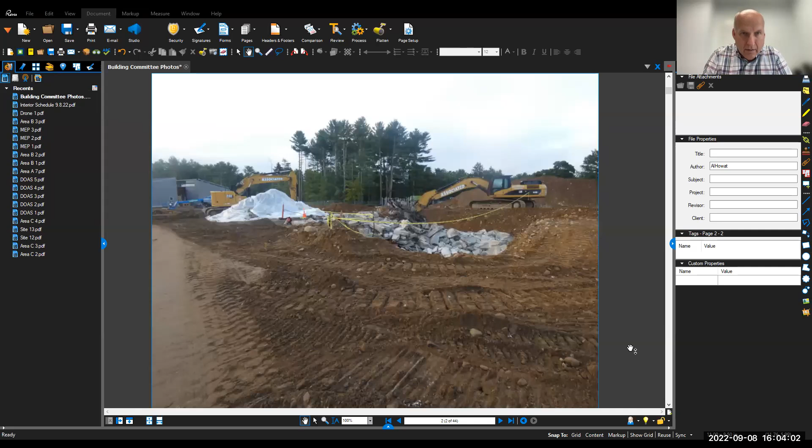Al, can you give us your update? All right, I'll share the screen. All right, can everyone see the photos? Yes, we can, thanks. Okay, so this is what's left of the old school.

This pile is asbestos containing concrete. This pile here is non-asbestos containing concrete, but most of this was removed today, so they'll be completely done tomorrow. They'll have this graded flat tomorrow, including the asbestos material. There were 2 loads of asbestos that went out today to New York. Yes, that's all done.

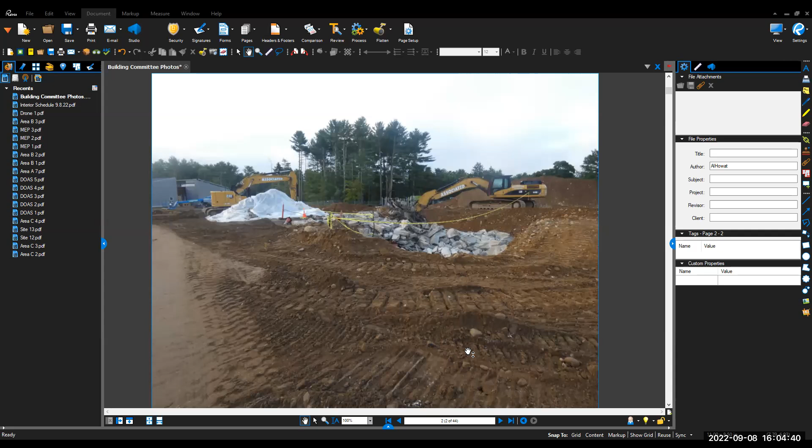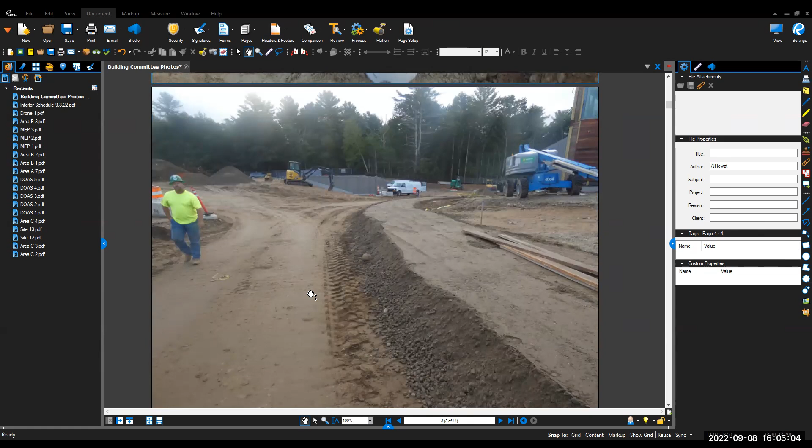They're currently doing site lighting in the parking lot area - parking lot site lights and bollards. We're also boxing out sidewalks around the bus loop, and this is down to the loading dock area.

We're spreading topsoil. This is the rain garden, getting ready to start the work here with the landscaper.

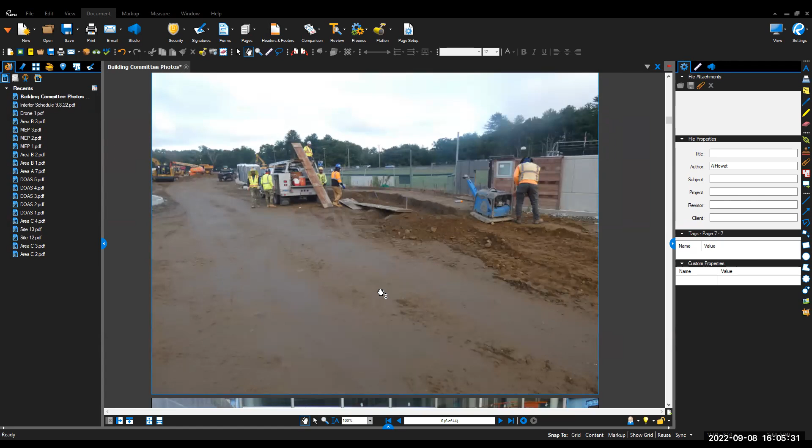They're continuing the sidewalks around the south side of the bus loop, forming those up today. This is the patio off the cafe, a concrete patio, so they started forming this up. They'll pour these in sections - there's probably about 12 sections.

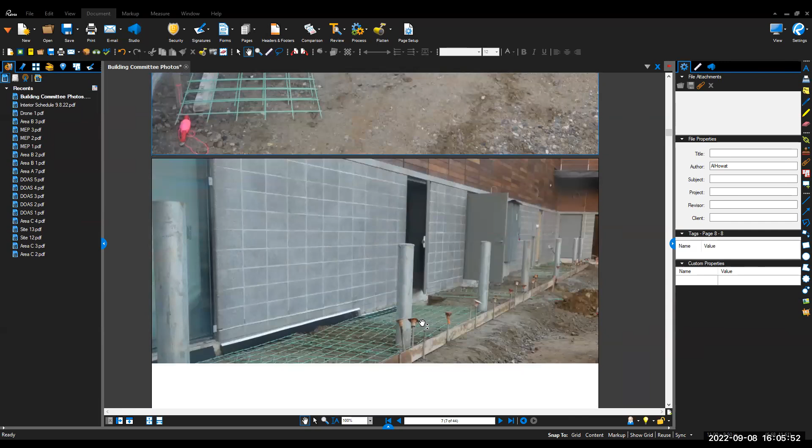This is sidewalk along the north side of B. A lot of maintenance, electrical, mechanical closets along this, right? So it's like a service corridor.

This is the entry canopy, started. Should be a couple of weeks.

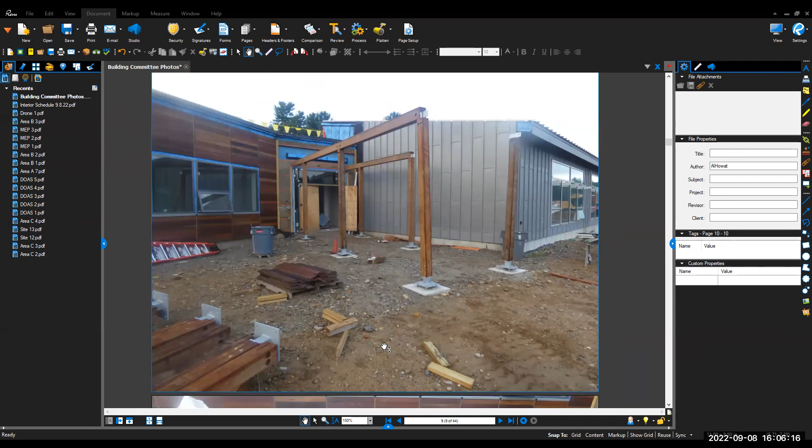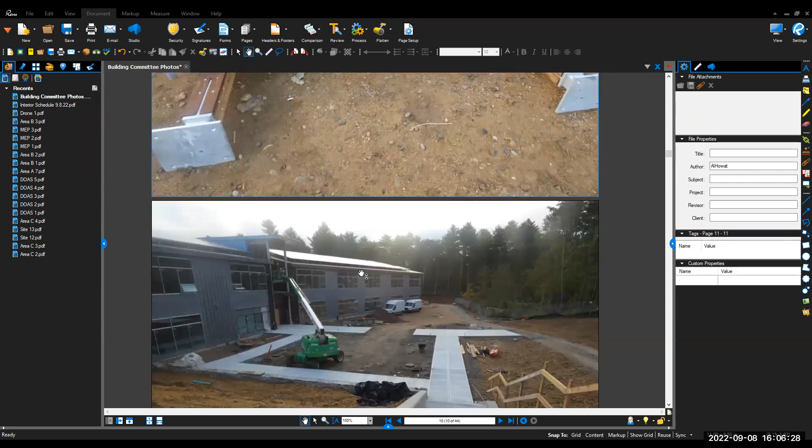This is the south side of building B, or area B. Getting the play areas established.

Is that area about ready for topsoil, Al, or is it not yet? I was thinking that the sloped area in particular. Oh yeah, they're coming through now with gutters. So once, I'd say in another week and a half, they'll be doing topsoil over here. They're going to concentrate on the south side of this ramp, then move to this side of the ramp once that's done. So I'd say a week and a half. At the next building committee meeting, you'll see topsoil here for sure.

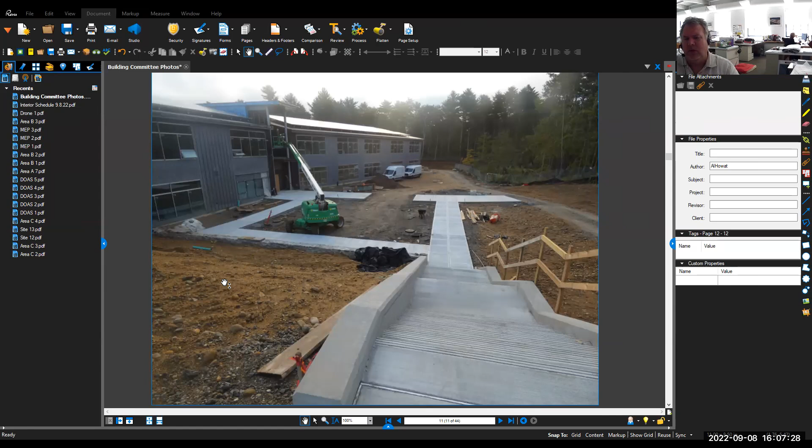Can I just add a comment? Tony had asked last time if there was going to be a guardrail along the top edge of that sloped area, and there is, because there's a sidewalk that's going to connect to the stairway, and there's a guardrail with some benches in front, and that's all for the playground that's behind us in this photo.

I think I have another photo. Oh no, just the playground being installed.

Al, if you could - Scott from Colliers, I would like to add one other comment: please make sure you're coordinating with zoning as far as completion in regards to turf establishment and stormwater management. Will zoning accept the project as complete? Will that permit be able to be issued if we're still waiting for grass to be established and if stormwater management measures are still in place?

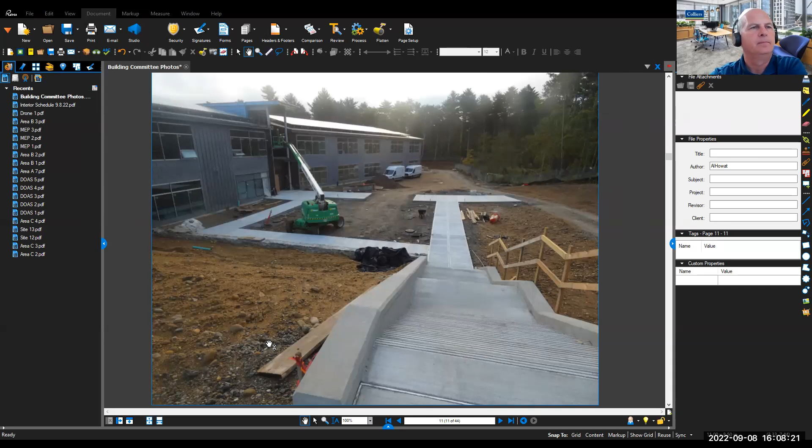Okay. It's the playground area over the detention system.

These are the site light bases along the south side of the bus loop. It's just about done. They should be backfilling and then boxing out this roadway, which will go right down to the loading dock eventually.

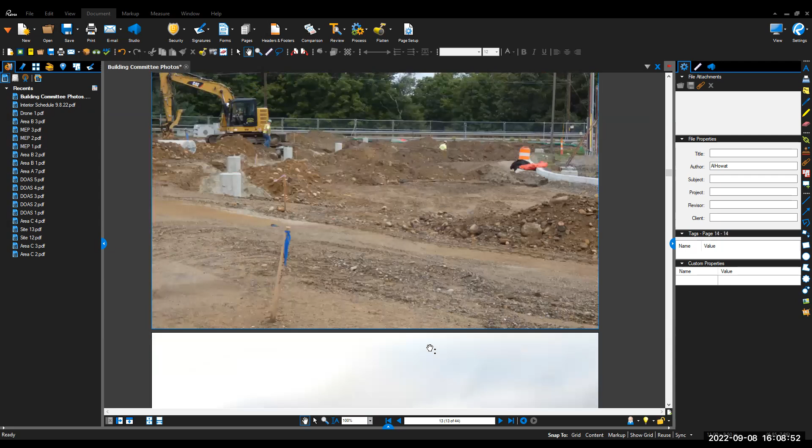Can I help you? Hi, yes, how are you? Good. All right, so this is the west side of the building, building A.

They're currently doing fascias over here, and gutters will follow shortly. They're working the backside with gutters, and then it'll be coming around here.

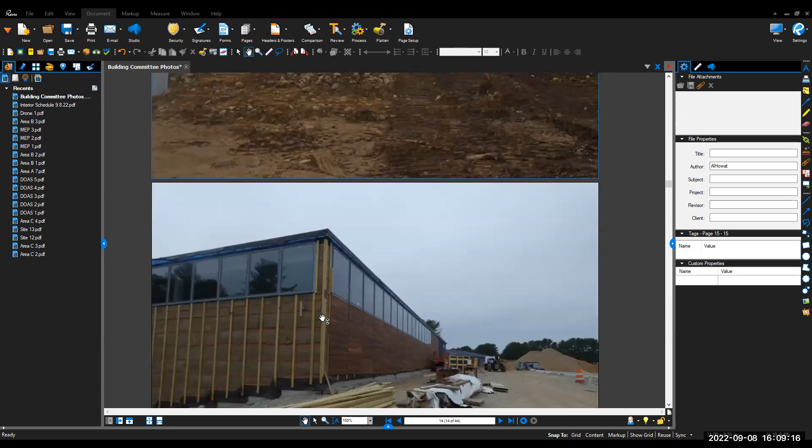This is the north side of the gym. This is the east side of the gym. They'll be here next with the Ipe siding.

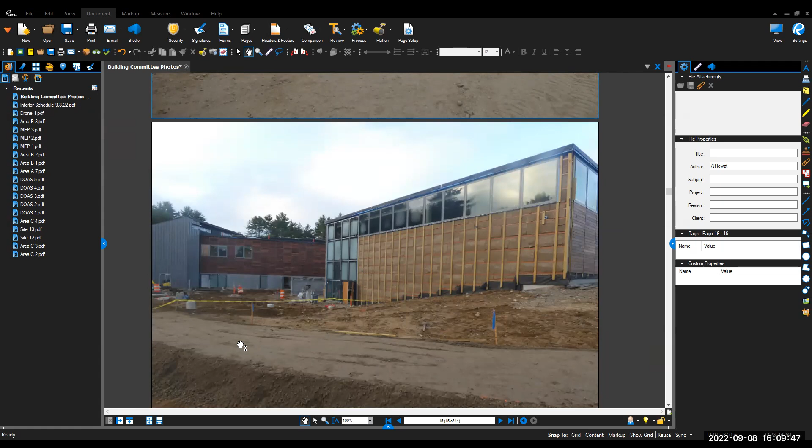They're just about done with the Ipe siding on the B area. They just got to finish up this little bit of soffit over here, then they'll be moving over to this area of the gym. This is the walkways that they're establishing now, concrete walks.

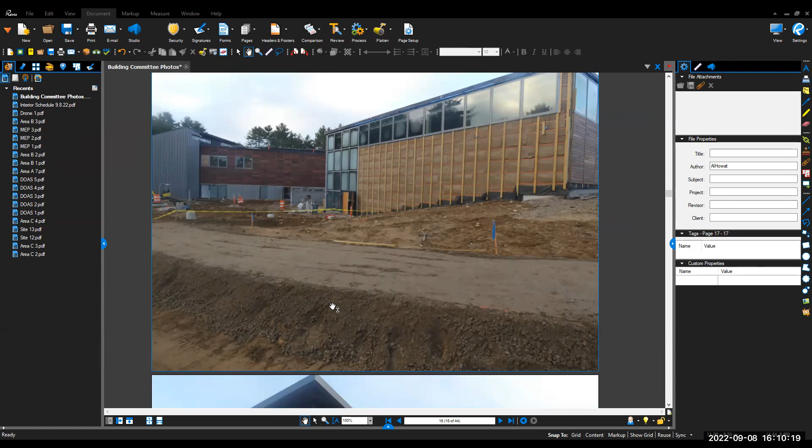There seems to be a drop off on the side of the sidewalk. Oh, this will be road base over here. So it will be level when it's done? No, actually the sidewalk will be higher, about 6 inches higher than the roadway. There'll be a monolithic curb and walk here. Okay, thanks.

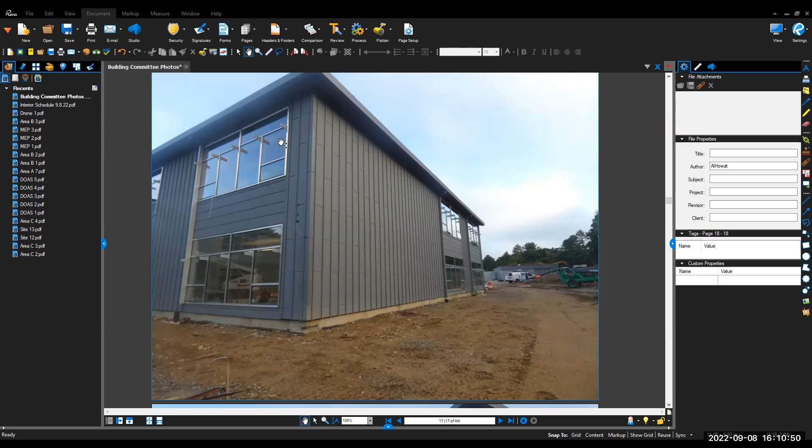So this is the east side of the B North. The fascias and soffits are complete. The gutter is complete in this area. They're doing downspouts now. They got 2 downspouts over here, and more coming along this side. The sunshades for the windows showed up and are starting to be installed. This picture doesn't have it, but they did start installing the sunshades today. Once the sunshades go on, they can finish their caps, and that'll be it for the exterior building.

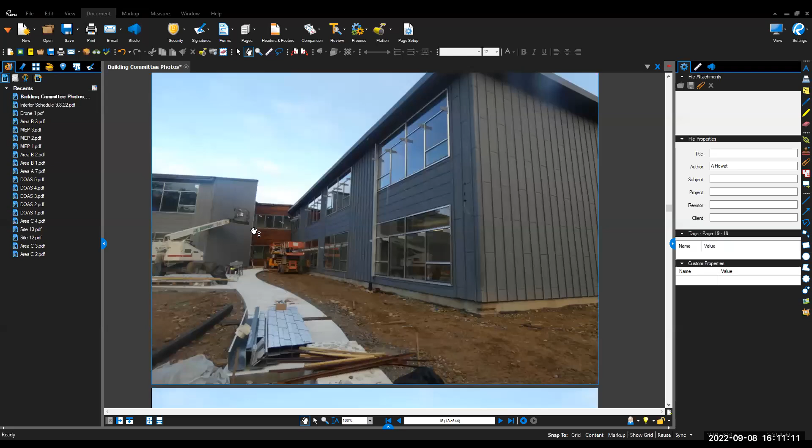Over here, they're working on the sunshades and the gutters and soffits. Just a close up of that. How much of the soffits are done at this point now? I would say about 70%.

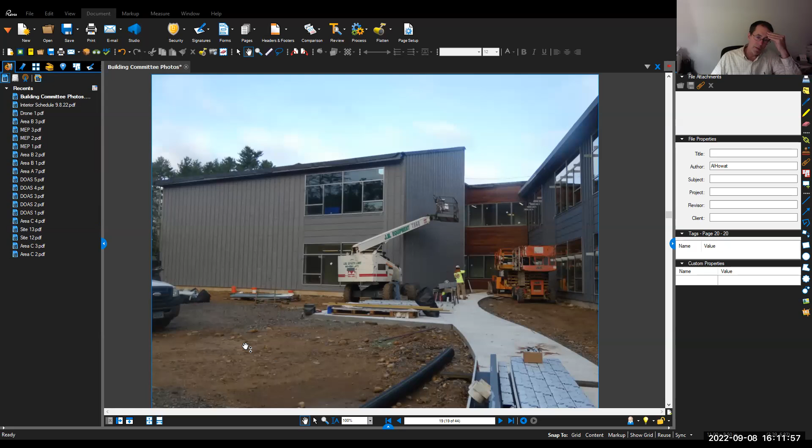Okay, Al, how are we doing on the air leak situation? They're working in area A now, so we should be getting a retest of area A, I would say the week after next. So can we assume these 2 wings are good? Oh, these 2 wings are good, they've already been tested. Yeah, area A had a small leak at that metal roof, and they're over there now buttoning that up. So that should be ready for a retest in the next week or so.

Al, I know we talked a little on the recent walkabout about the relative ease at which the panels can get dented, dinged, or punctured. Are these panels, if one did get damaged - I know color match and patina match, if you replace one down the road it'll probably stand out - but if one was replaced early on, is it just a matter of easily popping out one panel? Or is there a whole cascading thing where you have to pop a whole bunch of panels off to replace one? Yeah, it depends on where it is. I think the vertical panels are easier to replace than these. That's what I was talking about.

As far as scratching of this product, the zinc, it's this interesting material that we've used in the past, and when there are scratches and things that happen on it, it self-heals. It actually oxidizes and heals itself, which is interesting. As far as big dents and stuff, that's another issue, but we do have the standing seams that would prevent anything from hitting the flat part of it. But as with any building or siding, you have to take care somewhat of the school and the siding. So it does self-heal with any scratches, and we'll never have to paint it.

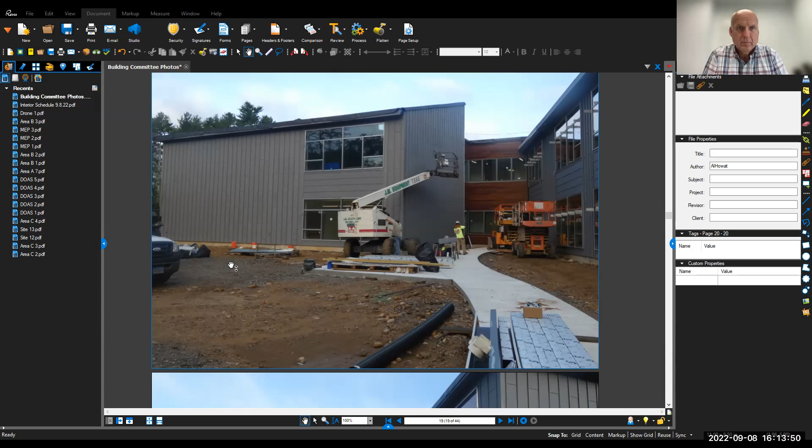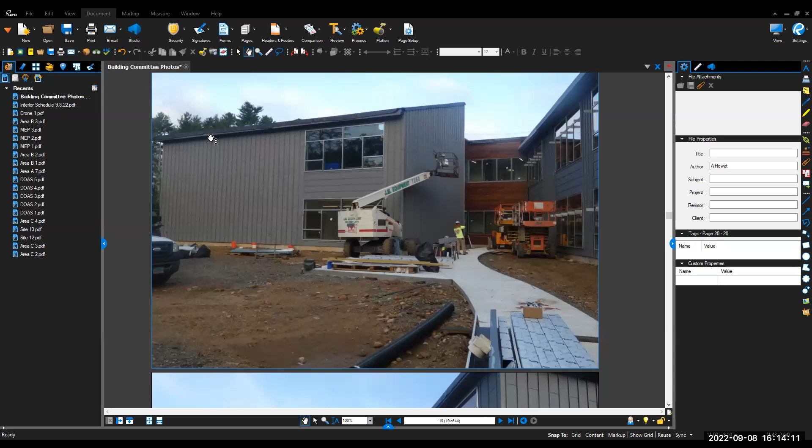So in this photo here, you'll see that the rubber roof is overhanging the edge here. The soffit and fascia is complete. When they come and do the gutter, which will be after this section here, they'll terminate the rubber at this roof before they install the gutter. So that's the next step. These fascias and soffits are done, and they're working on the other side now.

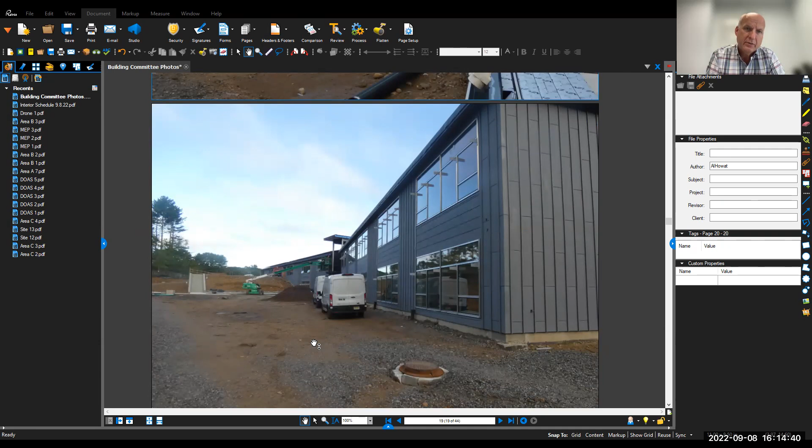This is the south side of A, and fascia and soffits are done on the B section. This is them over there, working the A section now. Then they'll move over to the other side with the metal, which they're doing, and that will complete fascias and soffits. Once the caps and the light shades are on the window, that's when you can do the topsoil in that area. I guess - yes, have to.

We can work off lifts from this gravel area if we had to, but we think we're going to have these done in time. They know that we have the flow of work getting out of this area here first, and then working around the building counterclockwise.

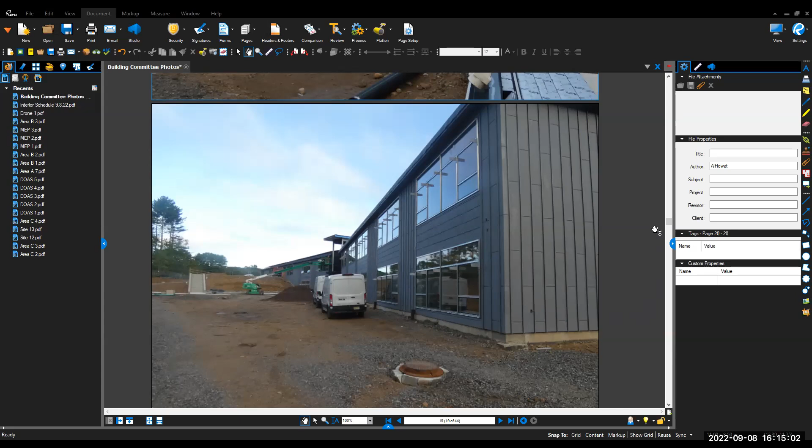Just a quick question for Jeff. What are being called sunshades, is that what they're called? Yeah, those little fins that are sticking out. You see, there's going to be a horizontal sunshade there that will deflect or reflect the light back into the classrooms. That's why I was curious.

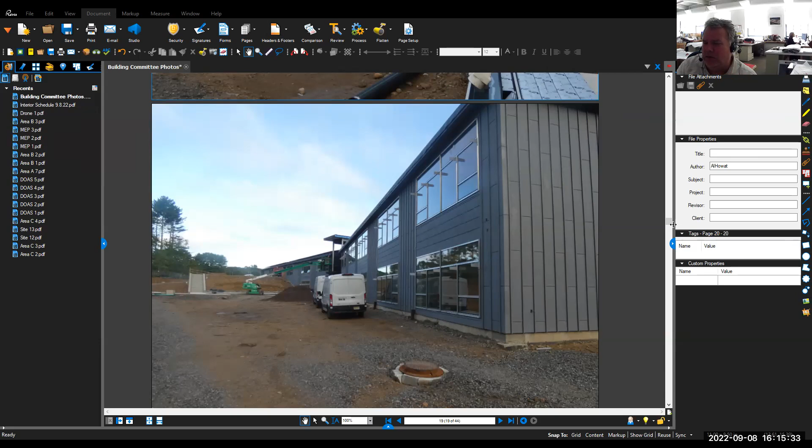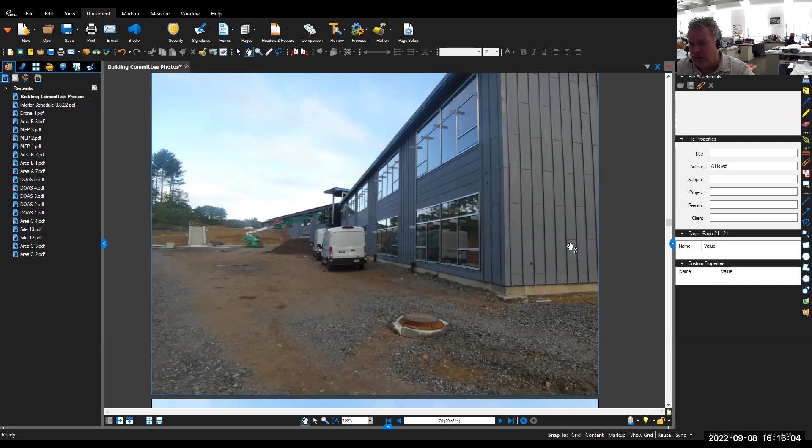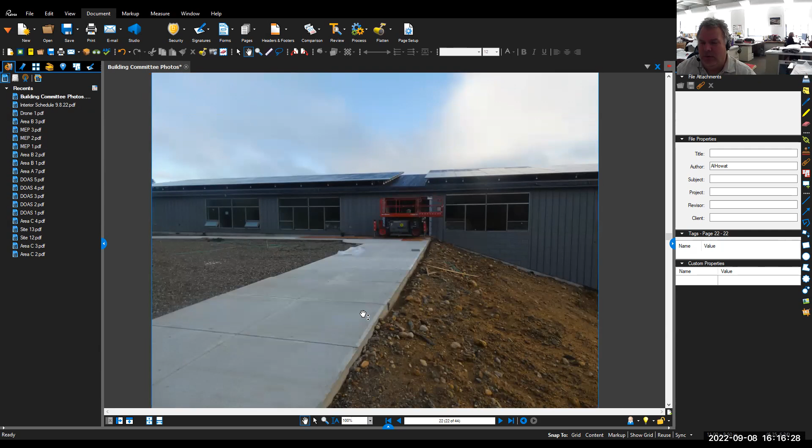This is area A. So that's where the guardrail will go, Tony, on the right side edge of that slab, right here. I believe that's 42 inches tall.

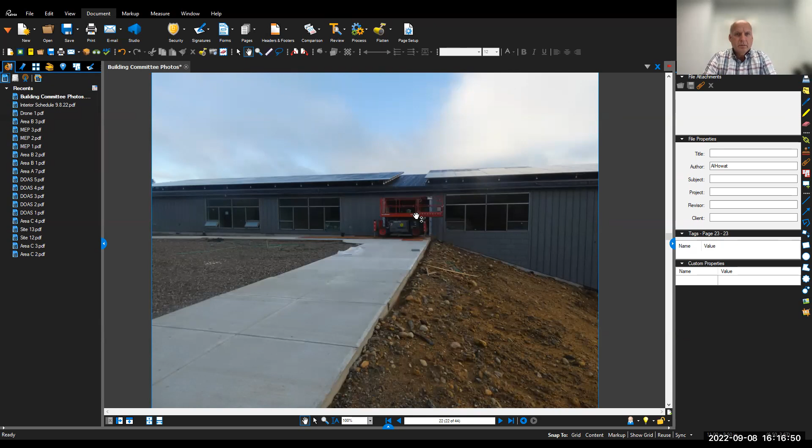And is the door in there yet? Or is that... can't tell. The frame is installed. We haven't installed any doors yet because those are the first things that would get damaged. So the doors go in, not last, but they go in when most of the work is done.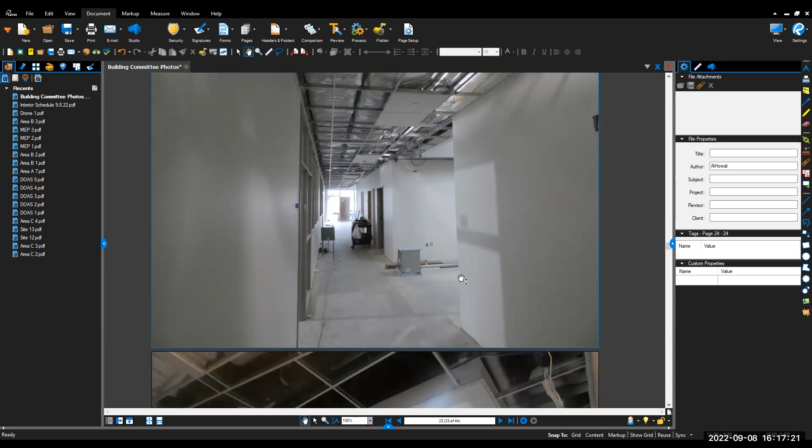This is the skylight area in A, which is completely painted. That's in the breakout space and next to the teacher workroom, so that's going to be a really nice space.

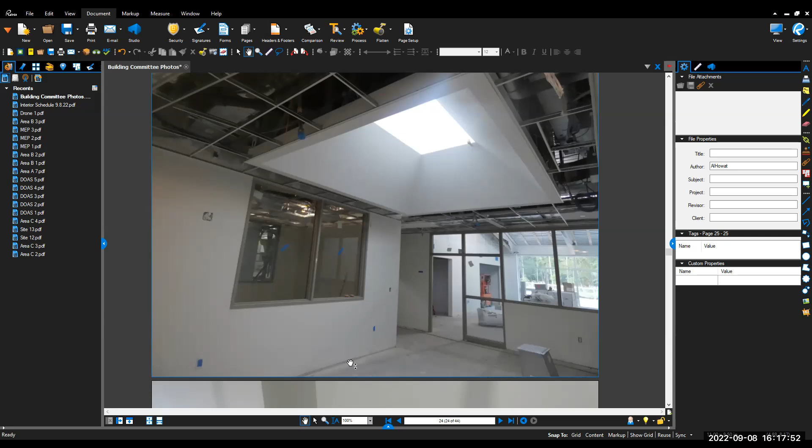Is this skylight installed there, Al, or is it? Yes, it is. We have all the skylights except for the one over the grand stair. That one is still coming in late, but we got the ones in the library, the round ones, and we've got these installed. They came in earlier.

Looks like that's a tremendous amount of light. Most of the interior glass is installed in A as well.

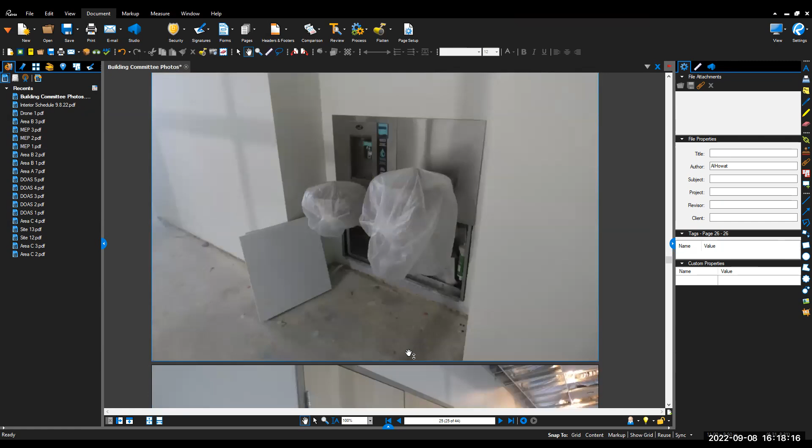Most of the plumbing fixtures have been installed in A. If you notice, there's a water bottle refill as well. Yeah, that's great.

These are what your doors will look like. We installed these doors only because this is a telecommunications closet and we wanted to keep the dust out, but these are what the doors will look like. This is a finished product, except for the hardware.

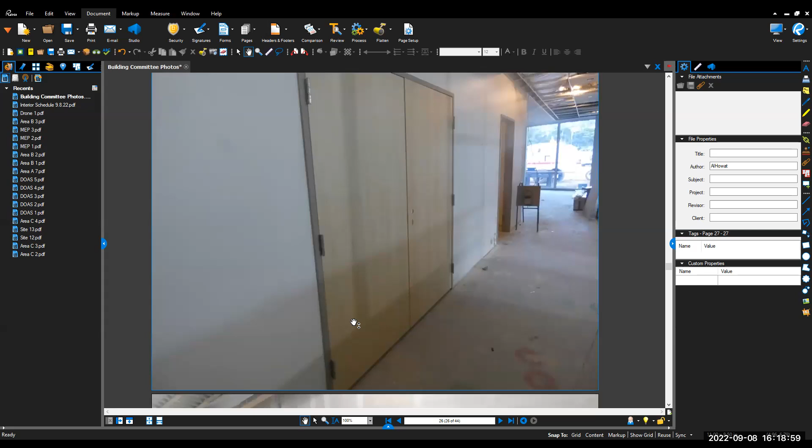That wouldn't include classroom doors, right? I'm not sure if the classroom doors have lights in them or if they're solid. Do you know, Jeff? I believe they're solid because we have the side lights. Okay, so this would be exactly like the classrooms as well.

These are all the marker boards and whiteboards. They all came in, so we've got that on the schedule to start install right after final paint.

Are these whiteboards or smart boards? These are whiteboards, smart boards are a totally different thing. I know, but the classrooms are going to have both? Yes, most of them, yeah. Thank you.

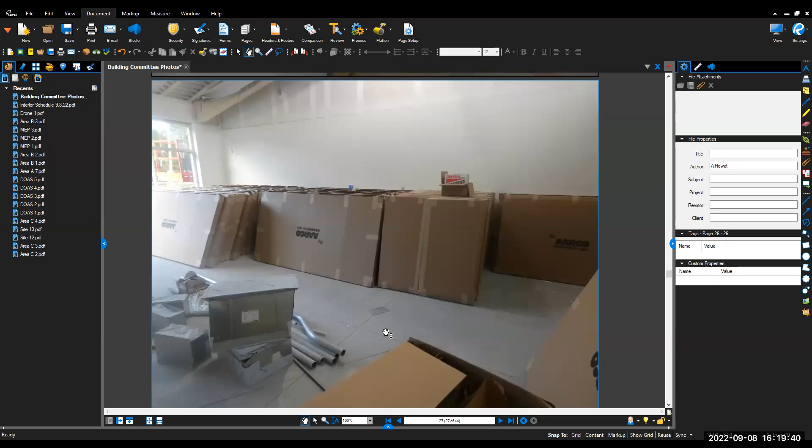So these are the bathrooms in A. They're not 100% done. They're going through now with their specialties, their grab bars and soap dispensers and all that stuff, putting those in. The tiles installed, the fixtures are in place, the walls are painted, mirror, door, and then final paint.

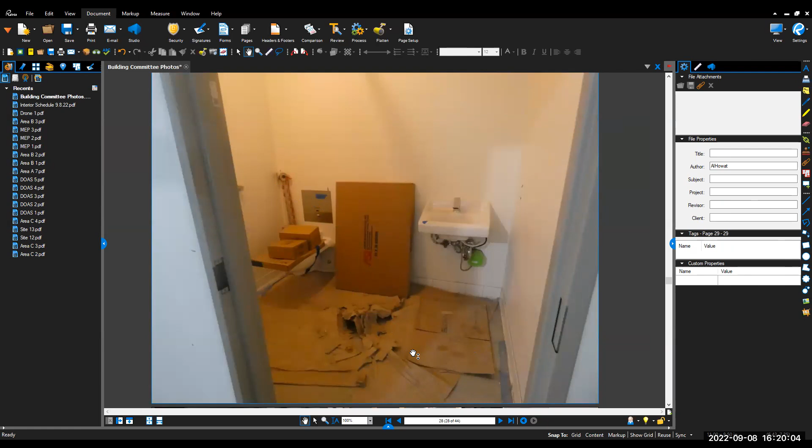This is your typical classroom in A. The walls have been painted, we're ready for wood on the ceiling, ready for millwork, and that's been scheduled. And that shed is gone now, you can see through the window.

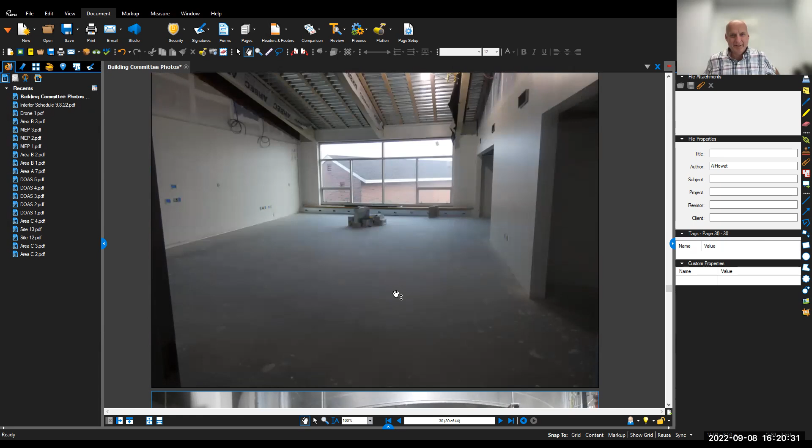Yeah, this is the old pump house. It got demolished, yeah.

All right, so this is what everyone was waiting for. This is the DOAS unit. Came in last week in pieces and they're hooking it up now.

What is that circular thing on the top? This here is ductwork. So this ductwork circles around and comes into the unit over here. And is that bringing in outside air? Yes. Okay.

So they just finished the connecting of the duct today on this side, and they're getting ready now to do the piping. You see the piping over here is capped off, but they're getting ready to do that now that the ductwork's done. Sorry, I want to go back to Tony's question.

It looks like in some areas we do have glass in the doors and other areas we have solid doors.

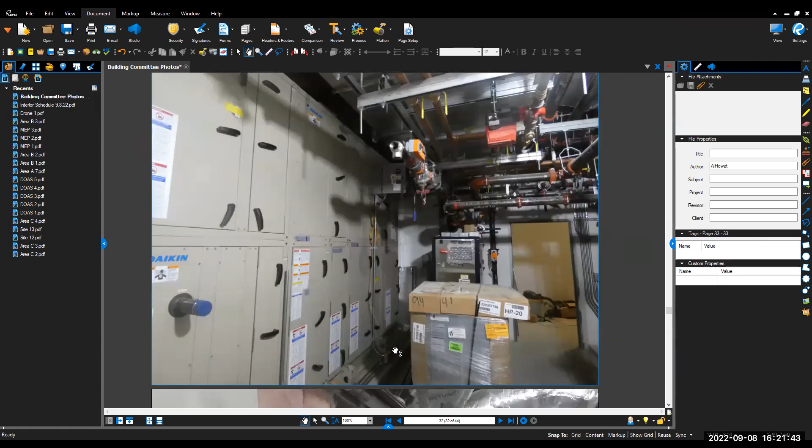So this is the interior of B wing. This is where we had to leave this out to get the DOAS unit in, so we've started framing these walls up now, getting that corridor complete. These are the interior walls in the mechanical room, framing those up now.

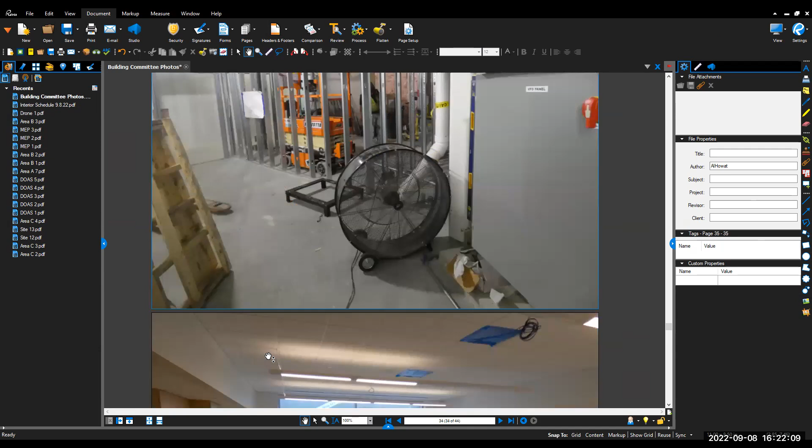And I didn't notice, Al, is the opening that you had in the side of the library been closed off? No, we have started closing off the interior at the corridor to get those walls in, but we left 2 doors out just for remaining items we need to get in.

Okay, 2 windows are left out. Those will be going in next week.

So this is your typical classroom in the B wing. The millwork is complete. Lights are in, ceiling is complete. Walls are painted.

We're actually going to be starting here. I have a finished schedule that I just completed. We're going to be starting here with final paint. That'll be a week from Monday.

Then where was the dusting problem, and when do we get to final floor? This area here is one of the areas that is dusting. We still have work to do on how we're going to remediate the floor for the tile. So that's yet to be determined. I have it on my schedule.

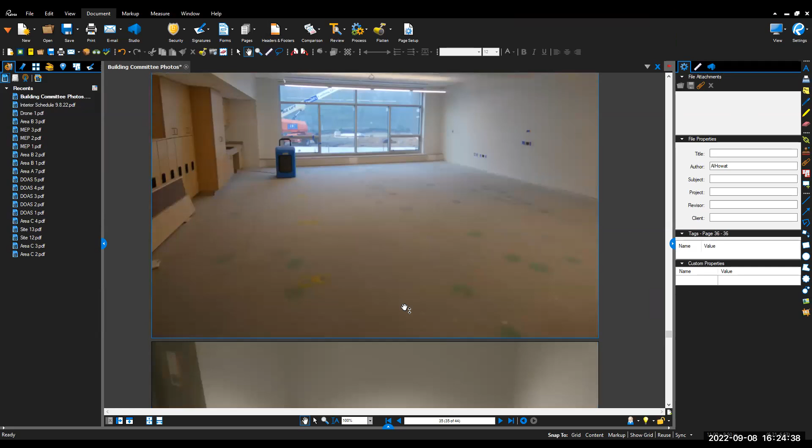The bathrooms now, they're putting in the baby changing stations, the grab bars, the toilet paper and all that. These are the unisex bathrooms. The partitions are in. They're installing all the grab bars and specialties in there now.

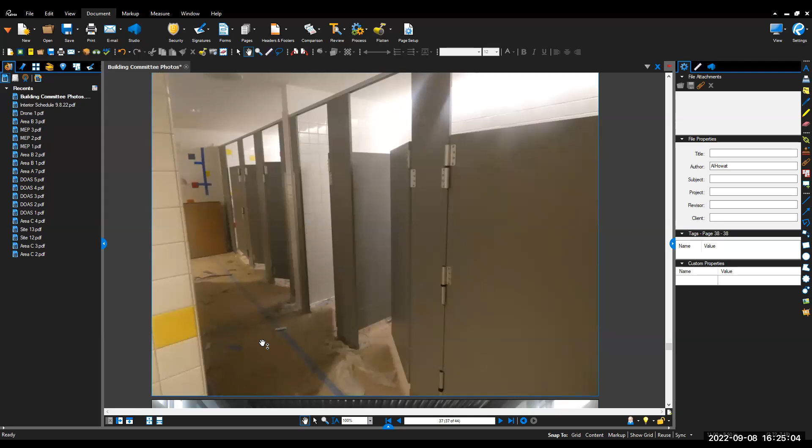So this is the area above the cafe. They're finishing up the drywall now on both sides. Monday, they come in and start the wood ceiling here. Once the wood ceiling's done, we'll follow with acoustical panels that go along either side.

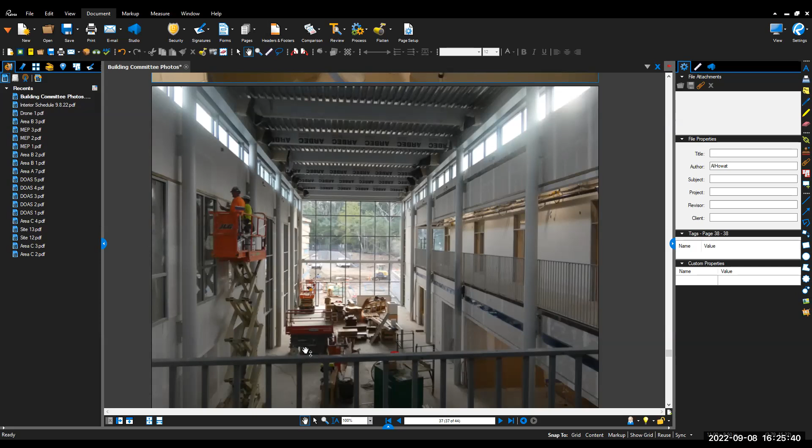Final paint, and then we're going to start the ceramic tile in here. Should be starting ceramic tile in 2 weeks. Yeah, that's the 15-inch by 30-inch porcelain ceramic tile, right? Yes.

So this is the area that we had to leave out. They just framed this out and sheetrocked it this week. So this gets an aluminum frame with doors going into the learning commons. Yeah.

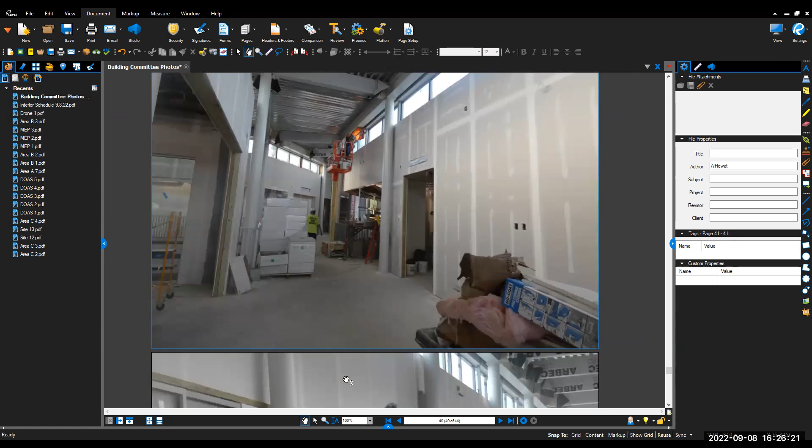All the interior glass is installed now at the gymnasium and the learning commons. They're finishing the drywall now around the windows.

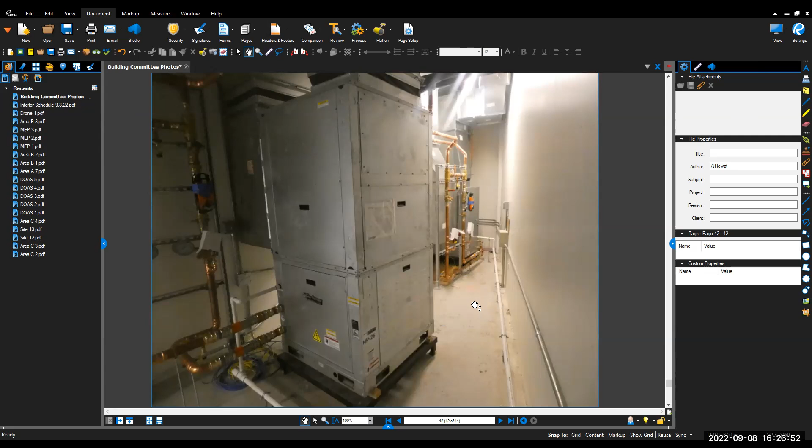Most of the heat pumps now have been plumbed and are under test. Once the test is done, they'll insulate the lines and those will be complete.

This is just the fire alarm boxes going in, control panels. That's it for photos.

Okay, any updates on the procurement log? Anything notable? Are there some things that you're still waiting on? I know there were a number of things promised in September.

Yeah, we got an update on the generator. The update was there is no update. We still don't know when we're going to get it. They're waiting on parts. So that's something that we don't even have a date for yet.

The fire pump is coming early next week.

Okay, and how about the elevator? Oh, the elevator will be here tomorrow.

And the stairs, what's the latest on the stairs? Okay, so right now, let me go back to that photo. Really can't see it, but there's a staging set up over the stairs right now. They're finishing up the drywall at the skylight here. Once that's done and painted, they'll take the scaffold down and we'll do the stair rail once that's done.

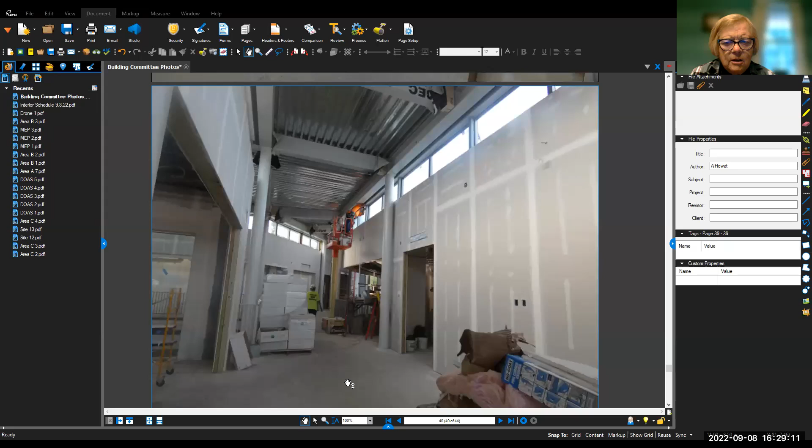Tony, you had a question? I'm not sure whether Chris was asking my question, but I don't understand how you repair a staircase where the risers are on an uneven level without taking it all out and rebuilding it.

No, I think I can answer that. The stair looks to me like it was prefabbed in the shop, and all the treads and risers, for the most part, were set at the proper height, except the bottom one and the position of the top one, where the tread should line up with the main level slab. Because the bottom riser was too short, it dropped the entire stair down to a point where the slab had to be pitched at the top, sloping slightly to meet that first tread. So by raising that whole thing up to get the top tread level with the main floor elevation slab, you'll get the bottom riser the same as all the rest of the risers.

Right now they've shimmed the bottom, so if you can imagine a very small increment, this stair is kind of tilted. They shimmed the bottom to get the riser height, but the top is still not level. So they'll have to break the stringers from the wall structural support, jack it up that distance, and make sure the riser on the bottom and the riser on the top match all the other risers. They'll also have to fix the rails at the corners, because in every condition they're all different, so they need to follow the drawings to make sure those are corrected. I'll have to follow up on that on my next visit.

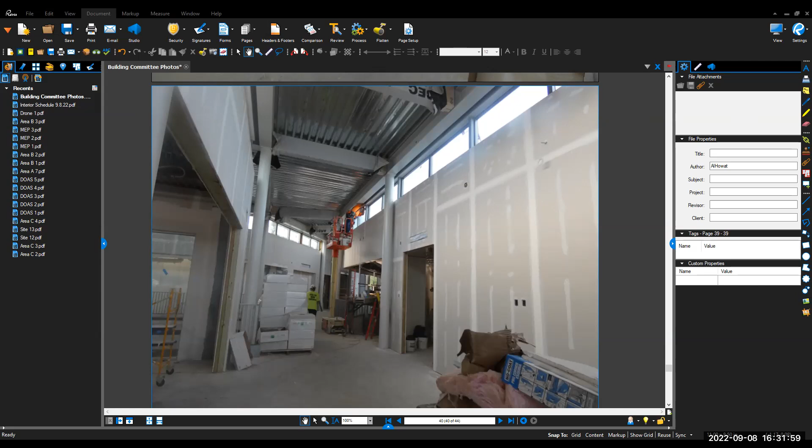I'm not saying it. Right, it's being fixed. It was definitely our mistake, we didn't pick up on that change, because they're different thicknesses. Correct. Yeah.

Right, are there other questions for Al? Okay, seeing none, then I guess we can move on. Thanks, Al, for that.

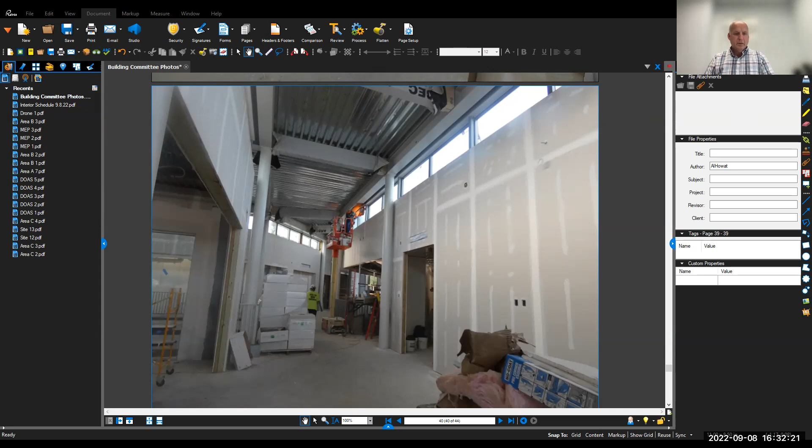All right, architect update. I don't have much other than the site observation reports, just trying to make sure we catch as much as we can and get them resolved. Newfield has been correcting quite a few things, so I've been taking those off as we go. Things that are left on are things I don't feel are complete yet. So we're moving with the field reports to make sure everything's done right.

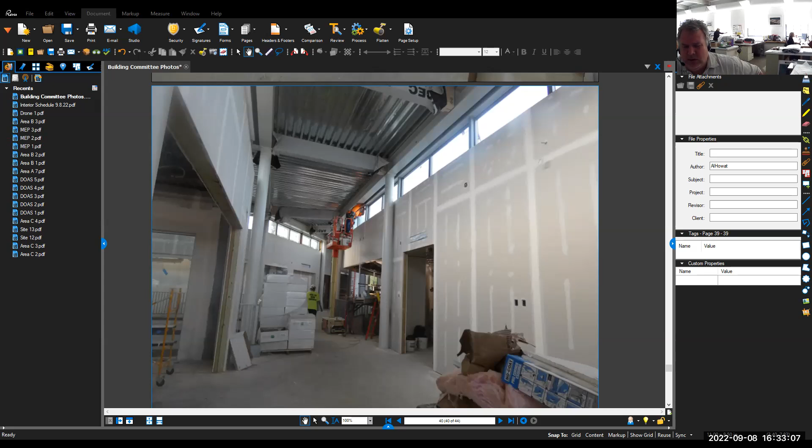Everyone's going to hear from Colliers, which I don't want to dig into and take their spotlight, but there's some issues coming up with the flooring, and we had a storm recently. I went through the site the next day and didn't see any window leaks or roof leaks, other than one area where the door was wide open downstairs, but I don't think that came in from the window system itself. It was just an opening in the music room where the door was supposed to go in. So I didn't witness any leaks, so that's good news. Other than that, we're moving through these field reports trying to keep everybody going as fast as they can without sacrificing quality craftsmanship.

Okay, anybody have questions for Jeff? Okay, then OPM update.

The high level focus I want to share with everyone, in terms of providing updates on things to target with regard to progress of the building, is the DOAS unit has been received, it's in, that's great. Now we have the generator. That's an item that's a big question mark. It's been outstanding on the log, but it used to have a delivery date, now there isn't even a delivery date. So that's the key procurement item du jour. There are a couple other items, but that's the most concerning and pressing, if you will.

In terms of some of the interior conditioning items we've had in the past, it's been hot and humid. Those, for the large extent, appear to have been resolved due to the conditions outside getting a little cooler, a little less humid, as well as the type of work being performed. The heat pumps are making their way in terms of installation, and there have been some issues overcome there, but we still need the permanent variable frequency drives to be delivered. So that's also a procurement item to watch on the procurement logs.

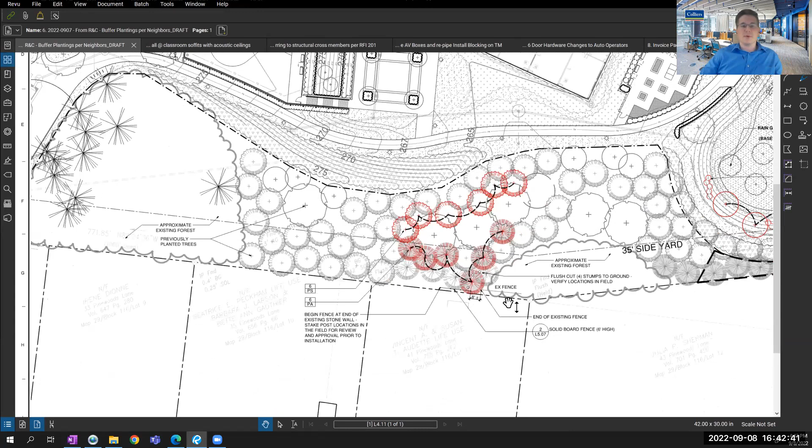We reviewed that with her and her husband, and the critical factor in terms of visual blockage is ensuring the spruces were on that ridge - if you recall, I took some photos showing the ridge. The spruces here are the larger size ones we had reviewed in a previous plan, not the smaller option that was approved, but the bigger 7 to 8 foot spruces.

I've also asked the landscape architect to look at even larger ones to see if they're available and can be priced for the committee to consider - maybe 10 feet, something like that - to provide even more visual buffer. The notion is that this two-tiered approach would help reestablish that visual buffer.

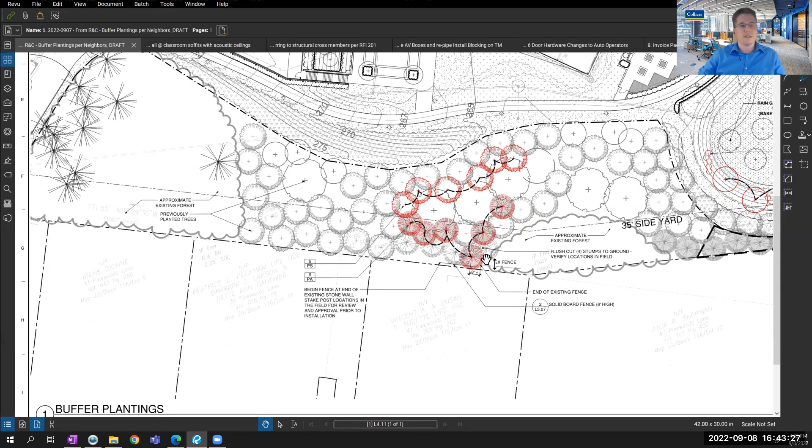The other element is these four trees here on the ridge line, just south of the ridge line, where there's a slope with a lot of stones and weeds growing up that normally wouldn't have been as robust, but since the trees have been removed from the margin buffer, they're getting a lot more sunlight than they used to, so there are more unsightly weeds growing here.

So the other component to help address some of the changes to the buffer was to install some of the fencing that was extra from other portions of the school site - some of that 6 foot tall privacy fencing - and install it here. They have an existing stone wall in this location, with an existing gap.

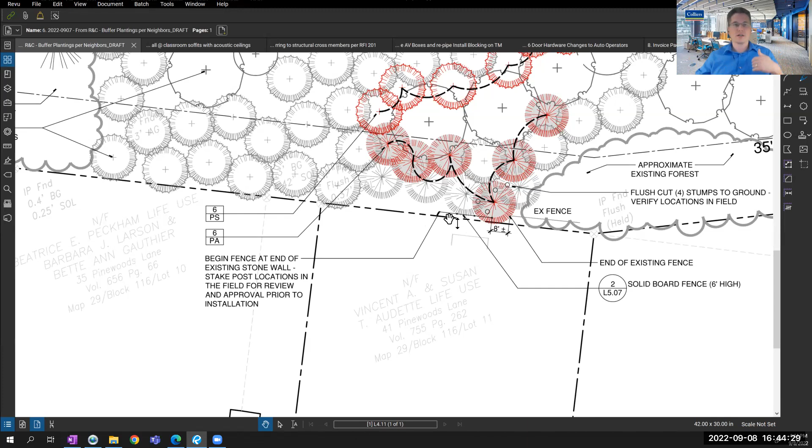So they had asked to place that fencing there to help provide another visual and physical barrier between the slope and some of those new bushes and trees in their yard. They reviewed that and thought it was a good plan, a good strategy to resolve some of the issues while maintaining the notion of restoring the natural buffer in place.

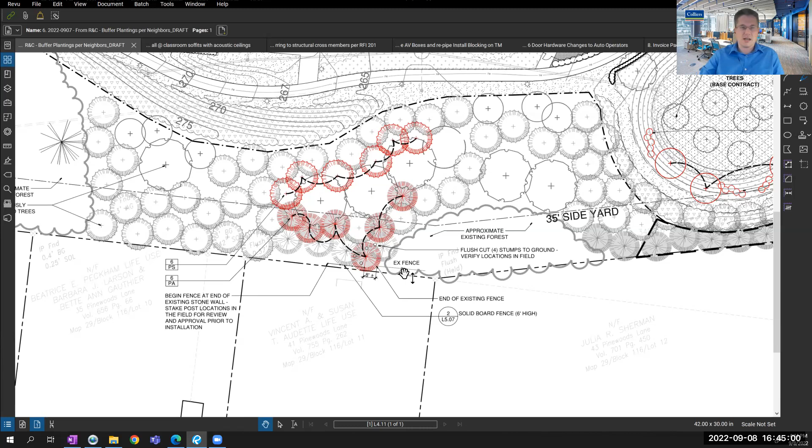So as I mentioned, we walked through this plan with both neighbors. Right now, the goal is to put this as a potential change order into Newfield to get actual firm quote pricing for this scope, and then I'll come back before the committee to present it as an option. Any questions there?

Madison: Just wondering, after having talked to them and looking at the sight lines again, when we looked at the pictures a while ago, it felt like the angle was such that it almost seemed like it was going to need a really tall tree. I guess I'm hoping that even a 10-foot tree would be helpful. And do you feel like the neighbors are satisfied and heard? Are you optimistic?

So we pointed out one of the existing spruces on the ridge happened to be an 8-foot tree—I think the town got one sort of for free when it was only supposed to be 6 feet—and it was on that ridge line. When you looked at it from the classrooms to the critical window, the bedroom window, because Sue pointed that out to us, translating that over, it would just cover it at the top of the crest. Obviously, as you went down the hill those get less intense, but there's less of an angle into some of the critical areas of their yard.

Moreover, just with the growth of the trees, the spruces—obviously it depends on a number of factors how much they grow each year—but from the landscape architect, after about a year of establishment they can expect to grow 8 to 10 inches. The white pines up front grow far faster. So on day one, would you still technically be able to see parts of the school building? Yes, but it won't take 10 years to establish a solid buffer, because we've got the eastern pines that grow at 1 to 2 feet per year, along with the thicker, denser undergrowth coming through, as well as the denser spruces up front. So there are multiple layers there that will block it.

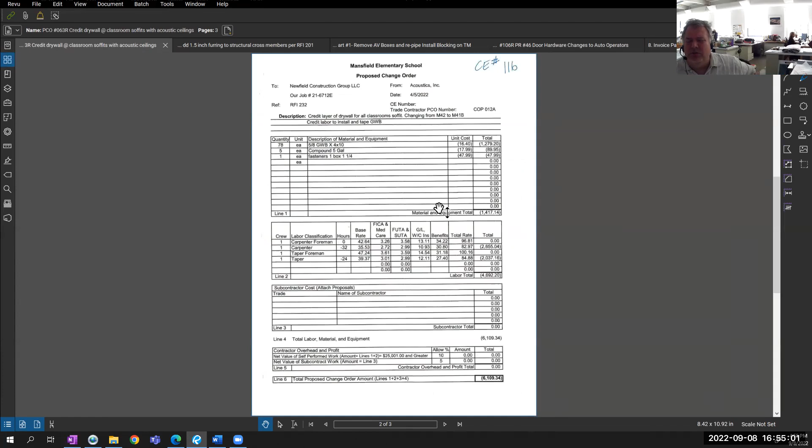It started out as a credit of about $1,700, but when I did the calculation, we had shown an additional layer of sheetrock on the inside of the soffits above the acoustic ceilings where the cubbies are. We continued the sheetrock up 6 inches so the ceiling could die into that. But because there was so much wiring and mechanical stuff in there, the question came to me, can we not do that on those soffits? I said, sure, show me the credit. So we got a $1,700 credit initially, then I did the calculation and they agreed to this number, which is now $6,100. It seems reasonable to me. It was a win-win for both the town and the contractor because it would have been a nightmare to have them do it. So I think we're good on this one.

I'd be happy to move we approve this. There's a motion to approve PCO 63R for $6,109.34 credit. Second, Madison. Any other questions? Then all in favor, please indicate. Aye. Any opposed or abstentions? Okay.

Okay, next one, PCO 68R. This is for $1,962 for some additional furring and some structural cross members.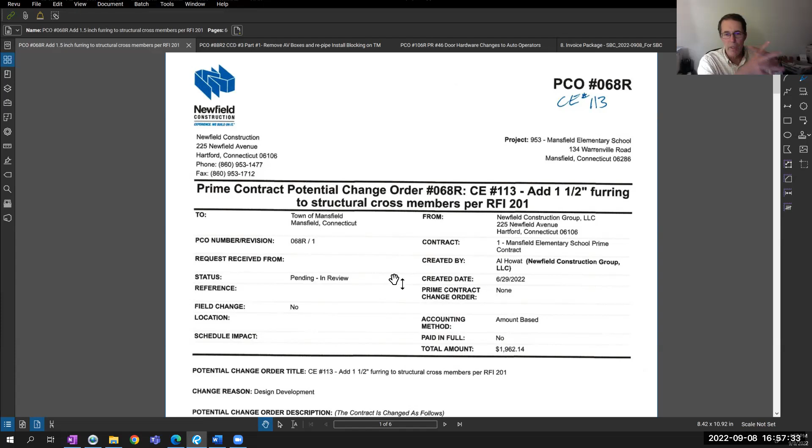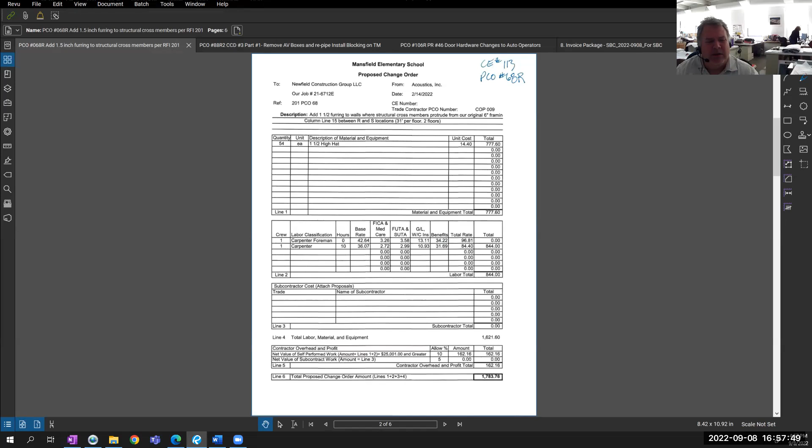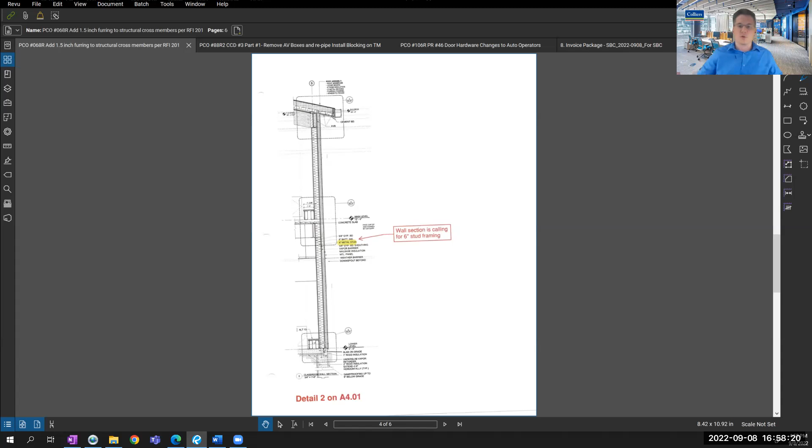Given that we made it easier for the electrician, who would presumably have ordinarily concealed their work, did they give us a credit, the electricians? Yeah, I think the number started quite a bit higher and we got it down to this number. I'm saying this was to help the electricians, correct? Well, it's to help everybody, because what we ended up doing is routing the conduit in the ceiling space below on the lower level, and then we furred out the upper to bring the conduit into where it needed to be without being exposed. So it was in everybody's interest that we needed to do this. There wouldn't have been space, Chris. It wasn't just a matter of making it easier for the electrician. The electrician couldn't put it in because the steel stud, the steel member, was in the way. So the wall needed to come out more so you could physically get it around. Well, there was that, but then there was also the run lengths, because I think the intention was to run it through the bench and then around into that wall. But the run lengths were quite a bit long in terms of the elbows and turning and getting around the brace frames and stuff. It's one of those things that happens in the field. We had to do it.

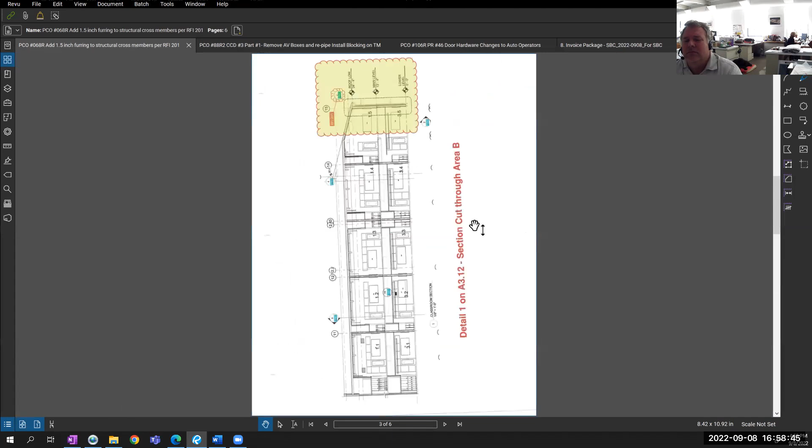Is there a motion to approve PCO 68R in the amount of $1,962.14? Thank you, Steve. Second, Madison. Then all in favor of approving the motion, please indicate. Aye. Any opposed or abstentions? Okay.

Just one other question on that. How many incidences of this were there, Jeff? Is this just in one place? One wall, on the B wing on the east side, southeast. A couple of rooms, I think, but one location, if you will. One wall, but 2 rooms, yes.

Okay, then PCO 88R2. This is the additional PCO for the AV rough-in. So this was one where the committee had previously seen a PCO and approved it with regard to the new locations that received the backup supports and a different AV box configuration and electrical, per Jamie the IT director's request, to facilitate the different mount types that were procured. That one went sooner than this one because that was all new work and therefore could be eligible for some potential state reimbursement. This is the other component to that, where there were 13 rooms where the electrical was done and 24 rooms where the studs were already done. So there was rework there that was not going to be eligible, which is why this one was separated out. So this is for stud work and electrical work in those rooms.

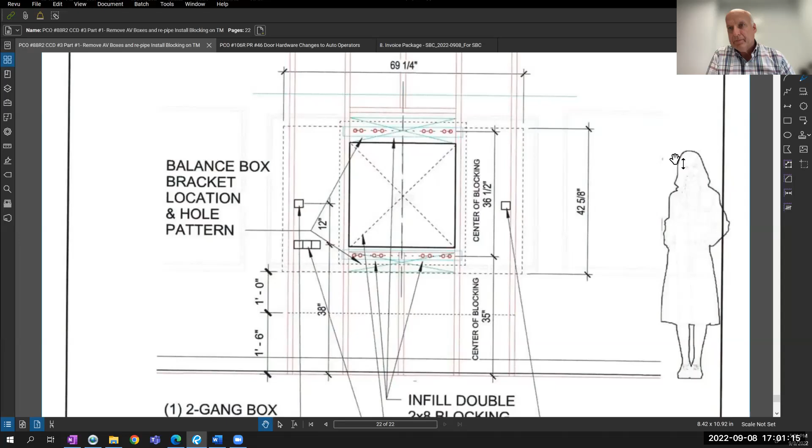So is there a motion to approve PCO 88R2? Thank you, Mary. Is there a second? Okay, Rich, thank you. Then all in favor of approving PCO 88R2, please indicate. Aye. Any opposed or abstentions?

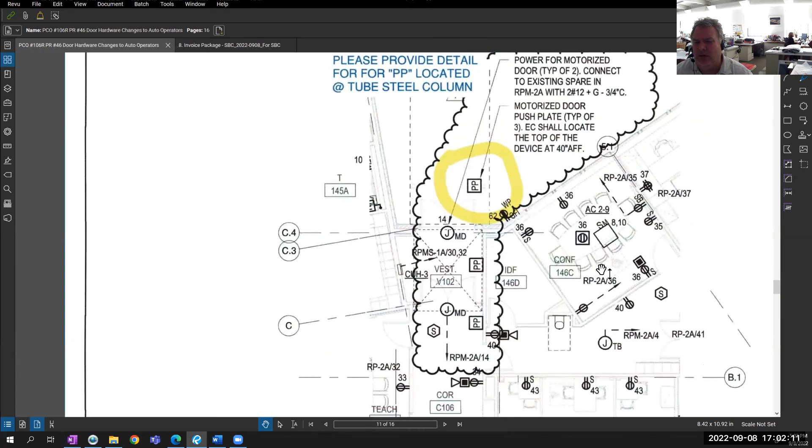So there needed to be some motorized door push plates, those ADA handicap accessible push plates. Where the canopy comes into the 2 entries, we needed to put those in, primarily because on the outside they need to have one to get into the vestibule and then one in the vestibule to get into the second. If they're exiting, the reverse has to happen. So the hardware just gets complicated. We had to add 3 in each of these vestibules, and that required some power to them.

And I believe that number was quite a bit higher, and we got that number down quite a bit as well. What is it now, 10,000? Yeah, we had to do it for handicap accessibility.

Did we have nothing before? That's a good question, I can't answer that right now. I don't know, nothing. I kind of don't get it, because it seems like this is a required thing. This is expected in every building now, certainly a commercial building. I'm delighted you got the price down, but it feels like this should have already been there, that this shouldn't be a change order.

I believe, I'll have to double check, but I believe that the main entrance we had one or two. We may have missed the middle one, and then the secondary entrance on the other side of the canopy, that's an accessible entry as well, so we added those. That would be the one into the kindergarten area. Yes, so there was nothing over there before.

The plates were there, the power was not. So it sounds like it was an oversight about putting power in. Somebody drew plates in there, but nobody said run a wire to it. Is that what I'm hearing? Yes.

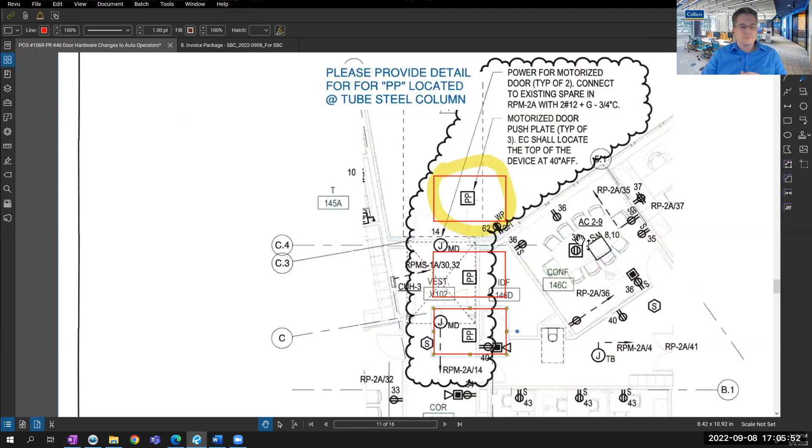Okay, so time for me to move out of town then, right? So, but since it's different from what was on the original drawings, it does require a change order to implement this.

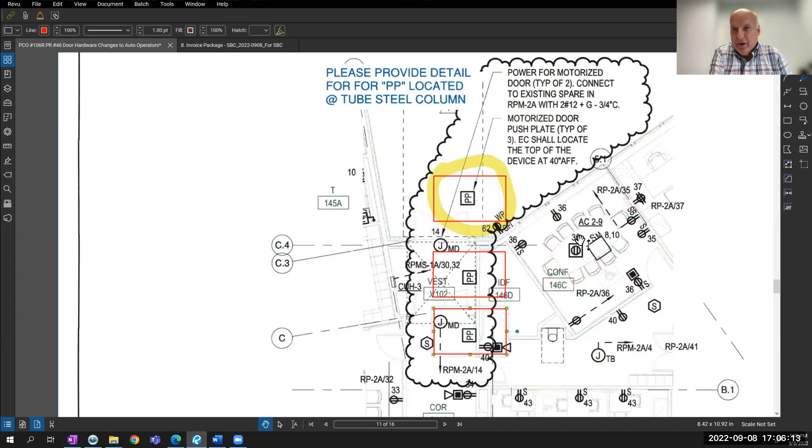Is there a motion then to approve PCO 106 for the electrical changes for the door auto operators? Thank you, Madison. And then is there a second? Steve, thank you. Okay, then all in favor, please indicate. Aye. Any opposed or abstention? Okay.

All right, and that brings us to the invoice package. Yes, so we will still have the typical August invoice package at the next meeting. This invoice package is a supplemental package to accommodate two instances that occurred from the last billing package.

One was, if you recall, there was a reduction in Newfield's pay application due to some subcontractors, or the one subcontractor, that did not submit certified payrolls required by statute. They subsequently got their documentation in order and submitted the certified payrolls. So this pay application is exclusively focused on that portion of the work that was rejected before, in an effort to keep the cash flow for the site contractor in this instance, to ensure they are still getting paid for the work done now that their documentation has been brought up to snuff.

And the other portion of it is for some IMTL invoices. If you notice, there's a number of them on this package. IMTL had some staffing issues, and their billing was not submitted for any of their projects for months and months. They finally were able to compile those and submit them back, I think it was a day or two before the last committee meeting. And while that wasn't enough time to review them, they had requested if we could review them and get those approved for the months that were missed.